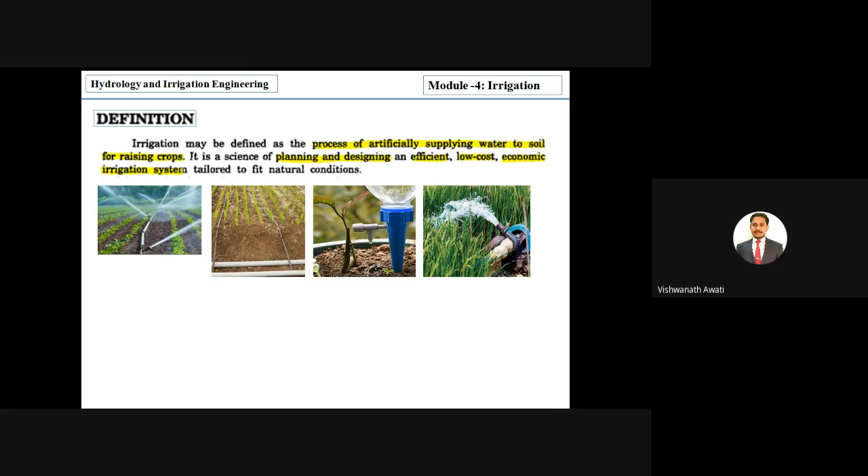I think we understood, we'll go to the next discussion: necessity. Why is it necessary for countries? For example, if we take our country India, most of the manpower and workforce is dependent on agriculture, and the country's resources and output also mainly depend on agriculture.

Water is evidently the most vital element in plant life. For good agriculture, we should supply water to the plant effectively, so we can get agricultural produce nicely. Water is normally supplied to the plant by nature through rain. However, the total rainfall in a particular area may be either insufficient or ill-timed. For example, a crop may be in a harvesting or rising stage, and there we won't get rain. So when water is required it may not come, but when it is not required, water comes. That is what is meant by ill-timed.

In order to get maximum yield, it is essential to supply the optimum quantity of water — that is, the amount required for complete growth of the crop. This can be achieved by artificial supply of water, and by maintaining correct timing of water supply. This is possible only through a systematic irrigation system, by collecting water during periods of excess rainfall and releasing it to the crop when needed.

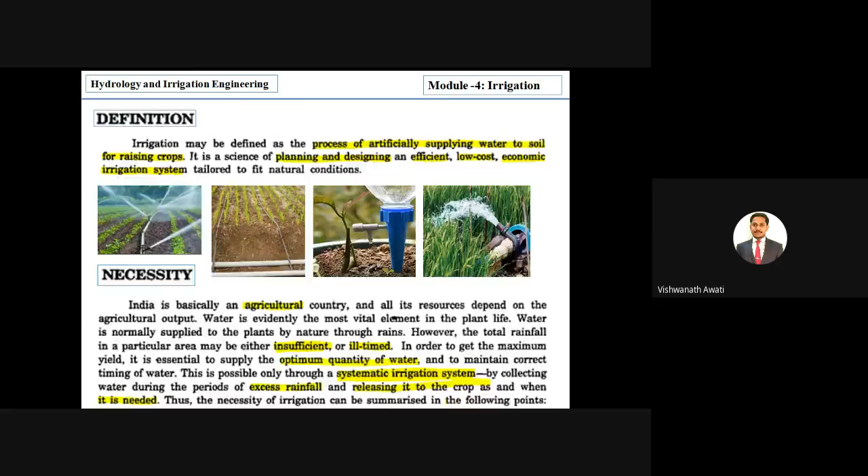The first point is less rainfall. This means when the total rainfall is lesser than needed for the crop. For a particular crop we require a certain amount of rainfall, for example 30 centimeters or 6 centimeters — a minimum amount of water for complete growth of the crop. When we don't get as much as needed, we have to supply water artificially.

So artificial supply of water becomes necessary when rainfall is lesser than needed for the crop. In such cases, irrigation works may be constructed at a place where more water is available, and this water is then conveyed to the area where there is a problem or deficiency of water, by constructing canals and reservoirs.

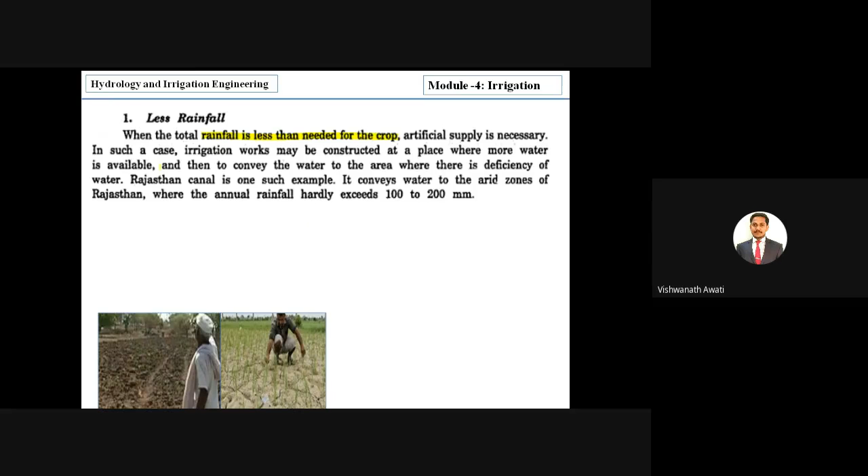Next is non-uniform rainfall. We have a very vast area, like one subcontinent, and in some places we get more rainfall while in others we don't get proper rainfall. For example, forest areas in the northeast states get more rainfall, while Rajasthan gets very lesser rainfall. So due to this non-uniform rainfall throughout the area, to manage this non-uniformity we require artificial supply of water to get a good crop. That is the main intention when rainfall is non-uniformly distributed.

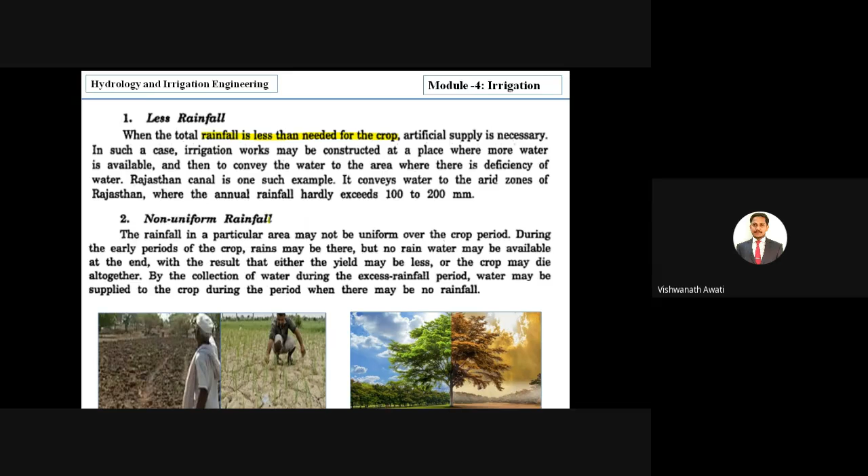Next point is growing number of crops during the year. Rainfall in an area may be sufficient to raise only one type of crop during the rainy season. We have two main seasons: Kharif season and Rabi season. The rainy season is called Kharif season, lasting around 3 to 4 months, during which we can grow only one type of crop. When we get shortage of water in Rabi season, it is very difficult to grow another crop. But when we have sufficient water to supply artificially, we can go for a number of other crops. Instead of keeping land vacant or empty, we can grow another seasonal crop.

Next is growing perennial crops. Take the example of sugar cane - such crops require more water throughout the year, for more than a year, like 1 to 1.5 years. So we can grow perennial crops like sugar cane if we have stored water that we can supply artificially.

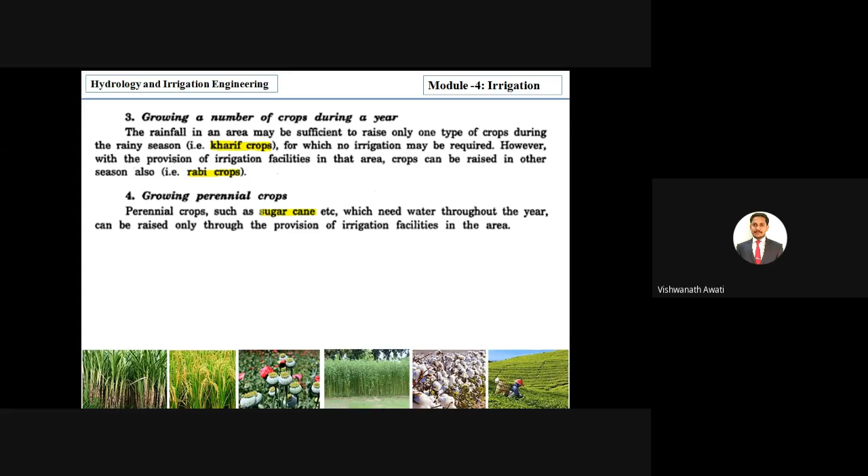Next, commercial crops with the additional water. Commercial means cash crops - for example sugar cane, rice, opium, jute, cotton, tea. These are all called commercial crops. Even cotton and jute, which are used to prepare bags, are commercial crops, and these crops we can manage properly with the additional water.

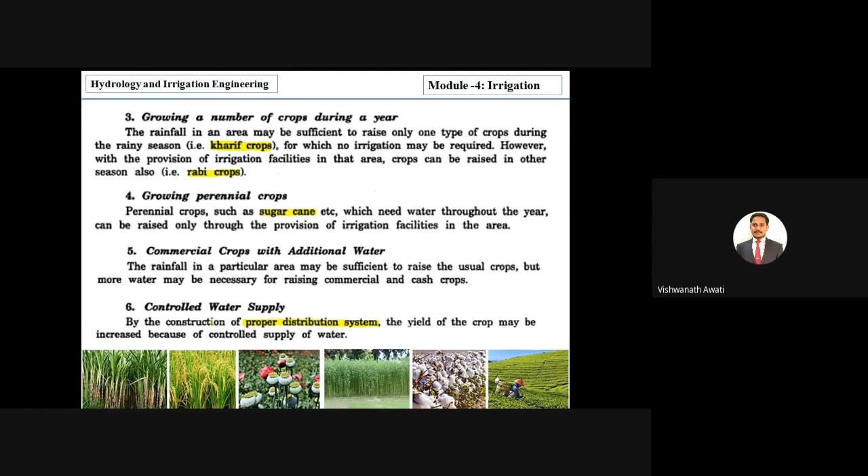Then controlled water supply. As I told, optimum water is required for complete growth of the crop - optimum means you should not supply more water and you should not supply less water. That management of water supply is possible through a proper distribution system, which we can achieve by constructing the irrigation system. So from irrigation we can make controlled water supply to the crop and get a good yield from it.

Next we will discuss benefits of irrigation. We discussed necessities, and those points are very important. Now we'll study benefits one by one. One is increase in food production - when we have good water availability, as we saw in the necessity of irrigation.

Due to good availability of water, due to controlled and timely supply of water to the crop, yield is increased. With assured supply of water, superior crops take the place of inferior crops, thus the value of crop is increased for a given crop. The optimum quantity of water required may be determined experimentally and then applied scientifically to the crop. Due to scientific analysis we can make good production. For example, if from 1 acre of land we are getting around 2 to 3 bags of seeds, due to proper management and scientific analysis we may get more - instead of 2 to 3 bags, you can get 10 bags of seeds. That is called increase in food production. If you see the graph, initially before irrigation there is small growth in food production with respect to increase in time or year.

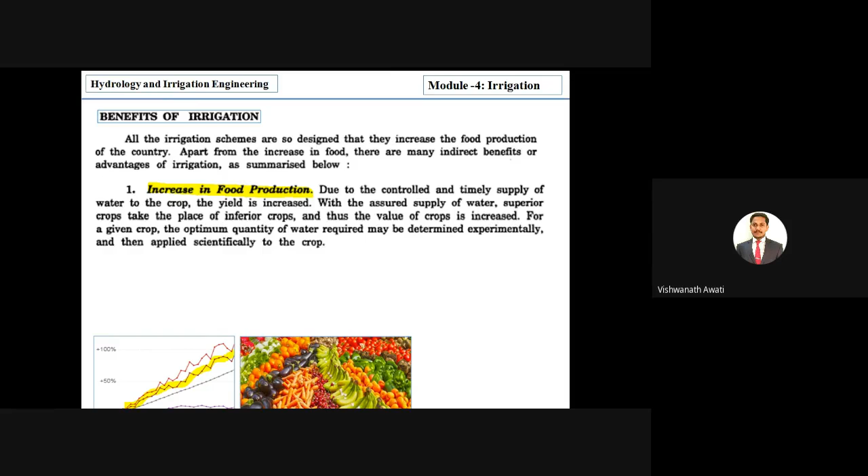Next is protection from famine. Famine is a natural-made problem mainly related to drought condition. Construction of irrigation works helps during famine and drought periods.

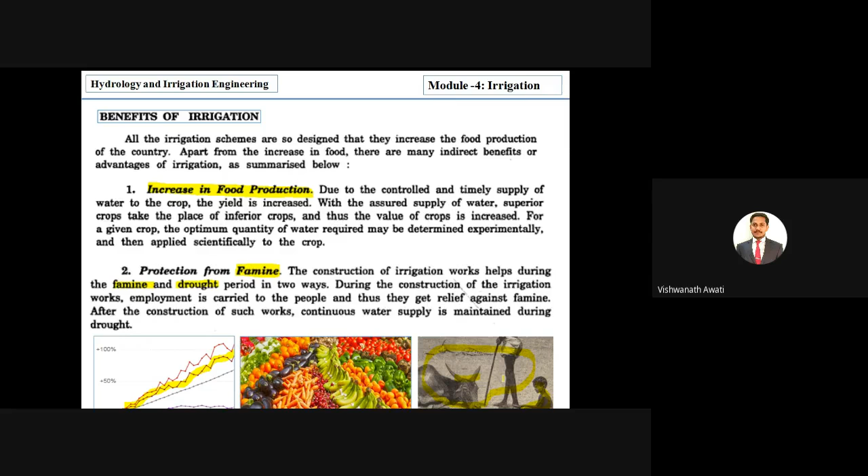We can overcome these kinds of conditions if we have a good irrigation system in our country.

Next, cultivation of cash crops. If water is available, then we can go for cash crops like sugarcane, indigo, tobacco, and cotton.

Then, elimination of mixed cropping. In some places, due to fear of non-availability of water for the next time, there is a requirement of different seeds, so farmers go for multiple seeding, which is called mixed cropping - meaning in one land we grow different crops. This can be reduced because we have stored water, like in a well, available for the next season. So we can go for one cropping, which gives a good effect on food production.

Next is addition to the wealth of the country. For example, when we have good growing conditions and food availability, we can call it a revolution in agriculture - the green revolution. You've heard about green revolution.

Green revolution means improvement in agricultural areas, and due to this improvement we get more production of farm products. Farmers get good benefits and pay water tax, and due to bumper crops produced through irrigation facilities, the country becomes self-sufficient. This reduces imports from other countries and helps in foreign exchange - we get foreign exchange through exports, receiving payment in dollars, which helps the country grow faster in GDP.

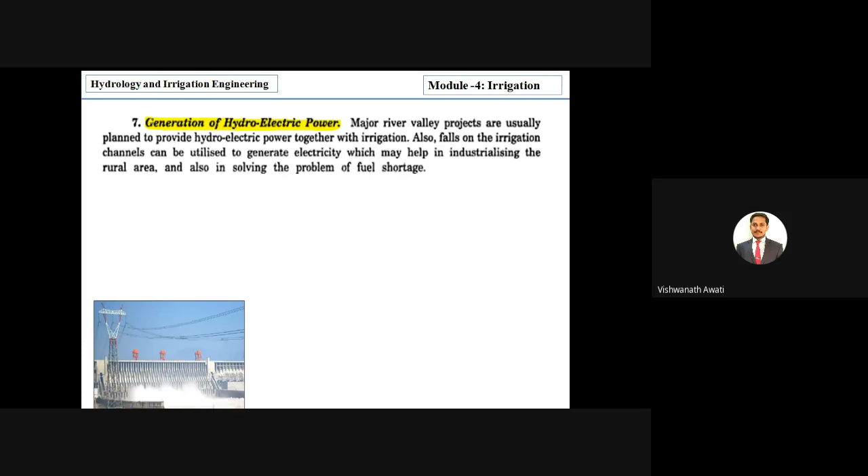Next benefit is generation of hydroelectric power. We have multi-purpose irrigation projects - any dam or reservoir construction is typically a multi-purpose project, not only for irrigation but also planned for hydroelectric power generation. Any dam will have a hydro power plant that is used when we release water to the canals. So before releasing water to the canals, it is used for hydroelectric power generation.

This helps us become self-sufficient in the power energy sector, with less consumption of fuel. It also helps in the industrialization of rural areas and setting up industries in rural areas. Due to industrializing rural areas, youth get good job opportunities, which helps in the total development of the country.

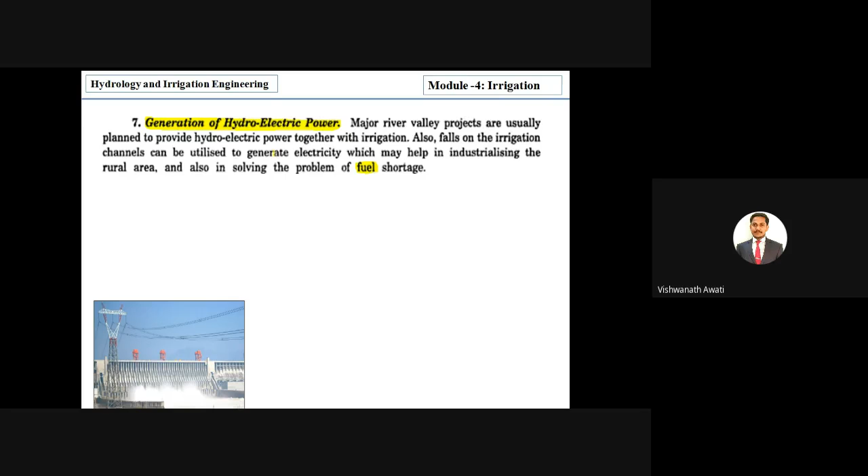Next is domestic and industrial water supply. Due to the multi-purpose irrigation project, we can also get water supply from it. In any metropolitan city or nearby cities, water supply is made from these reservoirs - for example, Bangalore's water is supplied from some of these reservoirs. So we can fulfill domestic water supply needs, and even industrial needs, supplying from the same project constructed for irrigation.

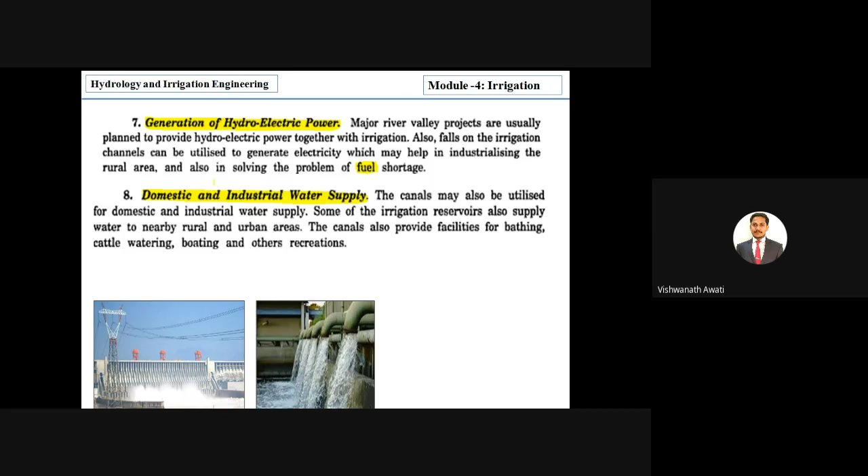Next is inland navigation. It is navigation other than the sea, done by constructing large canals. These canals are also used for shipping, and large canals can be used for inland navigation, allowing transportation of agriculture products to the mandis, helping farmers reach APMC markets. It also reduces road transport.

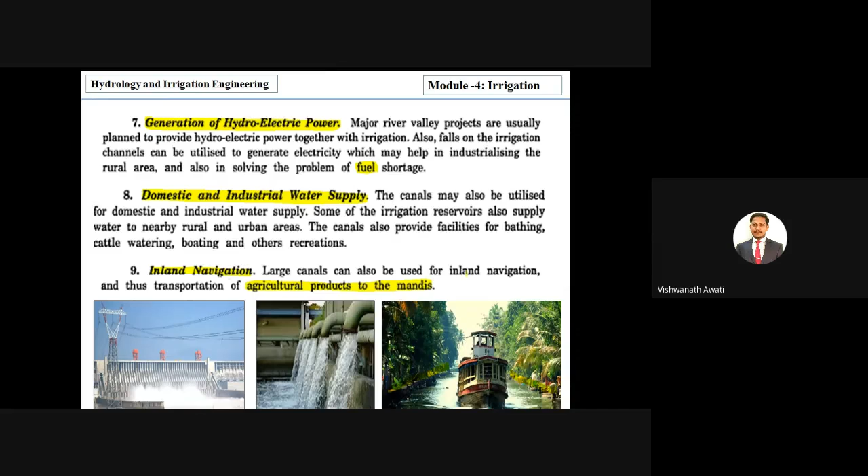Next we will discuss the ill effects of irrigation. We already discussed the benefits of irrigation, now we'll discuss its ill effects. You may get questions like 'explain advantages of irrigation' meaning benefits, or 'disadvantages of irrigation' meaning ill effects. They may also ask 'explain benefits and ill effects of irrigation' as a direct question, or 'advantage and disadvantage' which is the same.

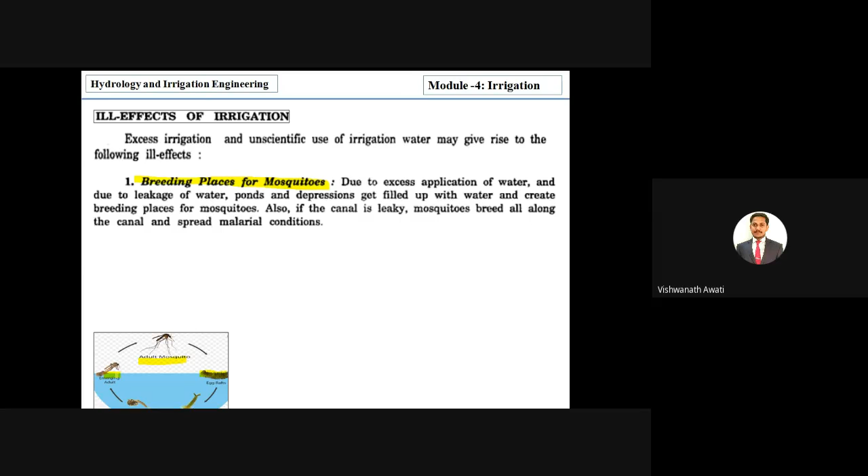We'll see ill effects one by one. First, irrigation creates breeding places for mosquitoes. The breeding of mosquitoes takes place in water - the adult mosquito lays eggs in water, which go through the larva stage and then grow into a mosquito. This entire process takes place in water. When we supply water for irrigation, it improves mosquito breeding, which can cause diseases like malaria. It is a waterborne disease that mainly takes place in canals due to water supply to agricultural land.

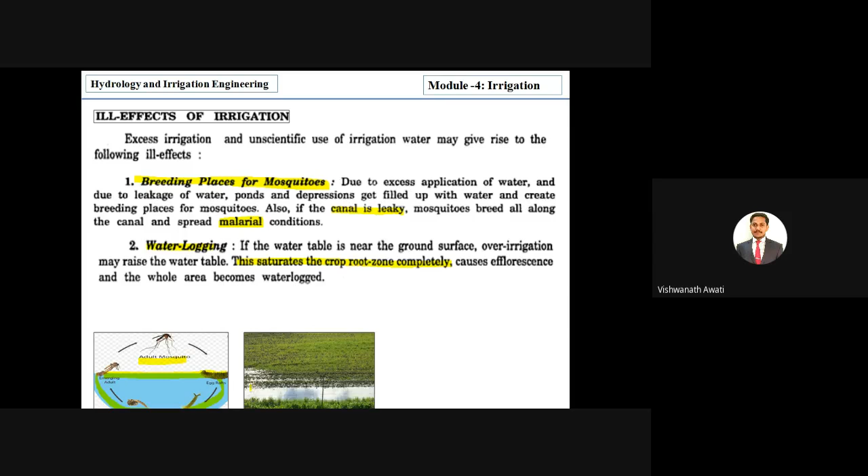Next is water logging. Due to artificial water supply, it affects the natural water table condition of the area, which before agriculture was different. This may cause rising of the water table, causing waterlogging - the crop root zone becomes completely saturated, meaning the entire land is filled with water. Due to this change, the area may become saturated and we cannot grow any crop because of continuous water in the land. As I mentioned, too much water is not good, and too little water is also not good - it requires an optimum quantity of water. This causes the whole area to become waterlogged.

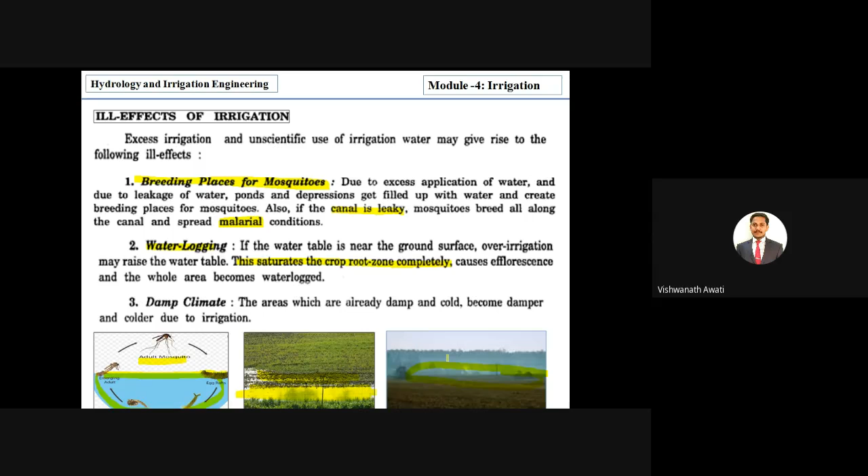Next is damp climate. Due to the supply of water, the surrounding area becomes colder. The artificial supply of water makes conditions colder, and repeated cold conditions make it more colder and damp, so the entire area becomes colder.

Next we'll discuss important questions. In December 2019, January 2020, and June-July 2016, they asked the same question: define irrigation, what are the necessities of irrigation. It may differ in marks but it's a repetitive question, mainly asking to define irrigation first and then explain why irrigation is necessary. Also in June-July 2019: define the term irrigation, briefly describe the factors which necessitate irrigation - same question asked differently, requiring point-wise explanation of why irrigation is necessary.

Next, in December 2018, January 2019, June-July 2016, and December 2015-January 2016, they asked: define irrigation, list and explain the benefits and ill effects of irrigation. Here we have to define irrigation first, then list points, then explain the benefits and ill effects of irrigation.